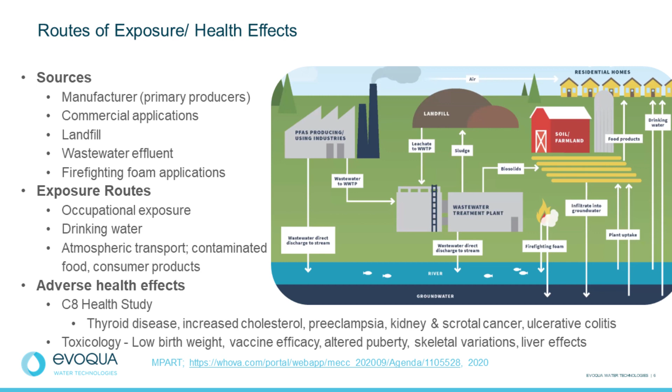In the end, results showed elevated levels of PFOA in the population, and we have since learned these levels in our blood can cause several medical conditions. According to the CDC, lab results have linked adverse health effects to growth, development, reproduction, and liver effects. So John will talk about water treatment solutions and present some case studies.

Hello, can people hear me? I'm sorry, I think there was an audio issue. Jeff, can you hear me? We can hear you, John. Sorry about that. I don't know what happened.

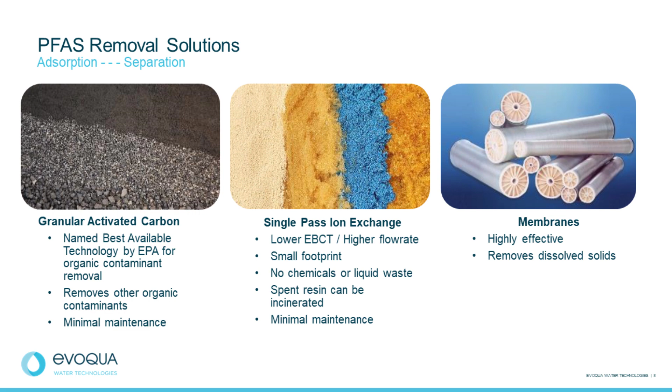Membranes, particularly RO and NF membranes, are very highly effective at separating PFAS from a water stream. They also remove other dissolved solids. However, you do end up with a smaller but more concentrated stream of contaminants at the end to deal with. There are a few applications that we know of where membranes have been chosen over either carbon or resin solely because of the number of contaminants in the water, not just PFAS but other things that have to be removed, kind of a veritable witch's brew of contaminants. So if you're not selectively removing, membranes are highly effective.

So why does granular activated carbon work? Granular activated carbon is a highly porous media. It has an extremely large surface area, so there's a lot of room for contaminant adsorption. That's AD, not to be confused with AB, absorption, very different processes. The structure of the carbon has a lot to do with it, which is why all carbons are not created equal. There are three main pore structures: the macropores, which are the largest pores, the mesopores, which are the medium pores, and the micropores, which are the smallest.

Adsorption actually takes place at the micropore. As a contaminant is adsorbed, it moves its way down that pore to get into the smallest area, the micropore. So the mesopores we call transport pores. We think of this as parking lots and highways: the mesopores are the highways and the micropores are the parking spots. If you've ever been to a sporting or concert event, if you have a lot of roads but small parking spots, you're going to end up sitting on the highway.

And if you have a lot of parking spots but no roads getting in, you're going to end up being stuck in traffic at the end of the game. So both of those things you have to balance so you don't get impaired diffusion into the pore.

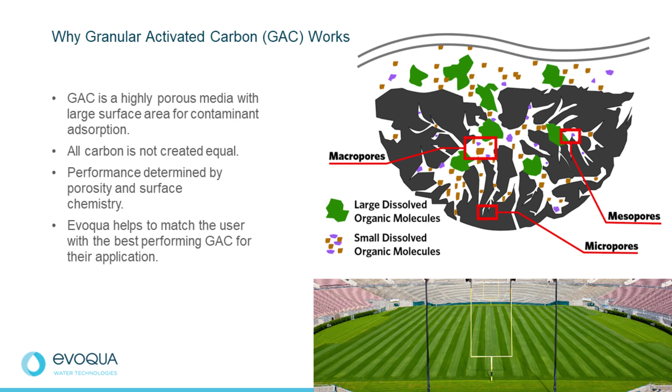So performance, how do you determine what carbon is best? Well, it all depends on what's coming in. We look at a combination of porosity and surface chemistry to determine which one's the best, and Evoqua does help do that to match the best performing carbon for the specific application.

So a little bit about ion exchange. So why and how does ion exchange resin work? Ion exchange is based on a very simple principle of exchanging a harmless ion for the contaminant. So in the picture there above with the green specks as the contaminants and the yellow circles as in this case chloride, where we're using an anion exchange resin for removal of PFAS.

So in this case, the contaminant exchanges a chloride and the contaminant stays on the resin, and the resin actually also has an adsorption feature to it. So it actually moves and migrates those contaminants down into the porosity of the structure. And then it exchanges basically the harmless chloride ion at the end. Because of this combination of exchange and adsorption, it basically uses a smaller footprint.

So if space is an issue, ion exchange resin may be a better option, all depending upon what's in your water and other competing contaminants and other things along those lines. Life cycle costs are a little bit easier to predict because of the effects of ion exchange resin, and the spent resin can currently be incinerated.

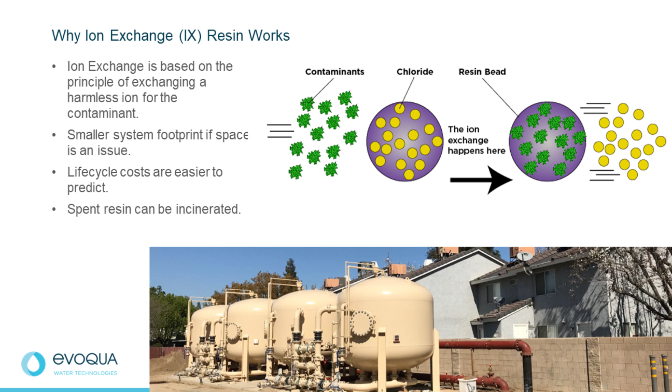So it can help you predict things like throughput, breakthrough curves, how long you're going to get, so throughput values, and performance. How are you going to get for removal? What components may break through first, et cetera. So between a combination of pilots or bench scale, usually depending upon the timing and everything else, one takes a lot longer.

Piloting is actually done on a slipstream of your feed water, and typically that can run for anywhere from months to a year. Whereas bench scale testing can be a simulation of a full scale system that can be done in a couple of weeks' time. Accelerated bench scale can simulate months of runtime actually within days.

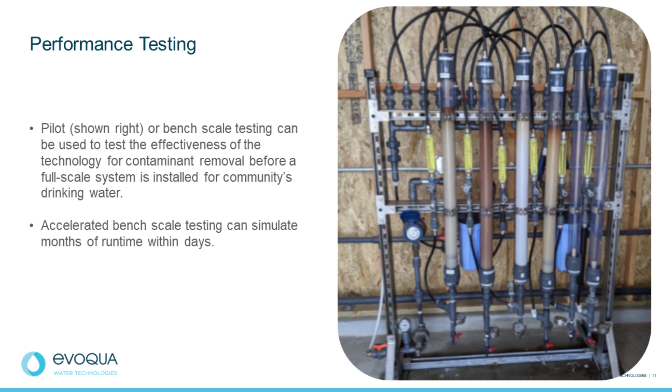One of the other things that's not on that, there's also the availability of mobile units. When operation can't be interrupted, or if there's an emergency situation, something rapid needs to happen. So Evoqua, and I know others, has emergency or rapid response equipment, trailers, vessels, other things, and we do it in more than drinking water applications. We can do it in construction site treatment or construction dewatering. We can do industrial process water treatment and industrial wastewater treatment.

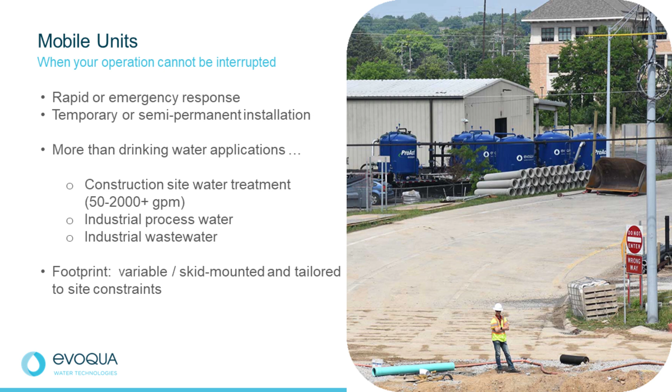So basically, the configuration can be determined by your flow rate and your contaminants, and we have variable skid-mounted and tailored equipment to fit your site constraints. And this is actually a picture of a site in Michigan for a construction dewatering project. So mobile units are an effective and temporary way to get people out of a jam or to keep processes running when an emergency or an event occurs.

So I'm going to talk a little bit now about some case studies. So we're going to talk about water treatment at a construction site and contaminant removal. This is a site up in Western Michigan that needed to be done in a quick timeline. It was installed about 6 months ago and is currently still active. They were doing some lakefront development, and there was a very high water table, and they found contaminants in the water, PFAS specifically, that needed to be treated for that dewatering to be discharged.

So the city set treatment goals to non-detect. So, 0 is an infinite number to get to. So non-detect means that it's down to the current detection limits, which is a very important thing. 0 really is a very finite number. It's an infinite treatment, but a very finite number.

For changing regulations and changing technologies, non-detect really is the way to go, just because it takes into account current standards. In this case, the treatment goal was met throughout the project and it's still operating, and it's been a good system for the end user, and it's been very easily maintained and serviced for the clients as well, for the construction company.

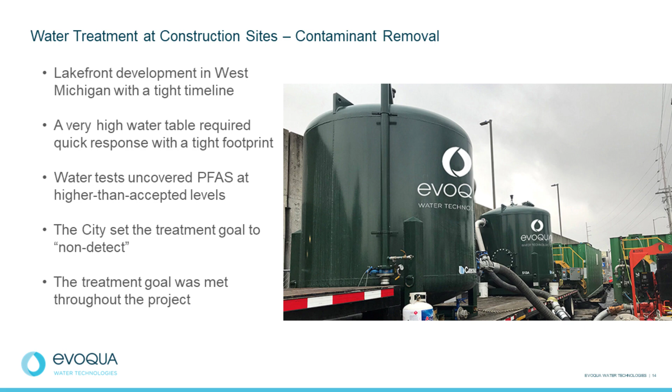We have another water treatment construction site. This one is in Muskegon. It was a temporary system, same type of thing, contaminant removal for a construction project. It was about a 6-week project where they were doing the same thing, construction dewatering. The water that they were having to discharge tested positive for PFAS, metals, and other organics.

So Evoqua was contacted, and we mobilized a system that tapped directly into the wellhead, and it removed PFAS, arsenic, mercury, and other contaminants that were in the water. So it was a very robust system. It cleaned the effluent discharge, which was put to a municipal sewer for further treatment.

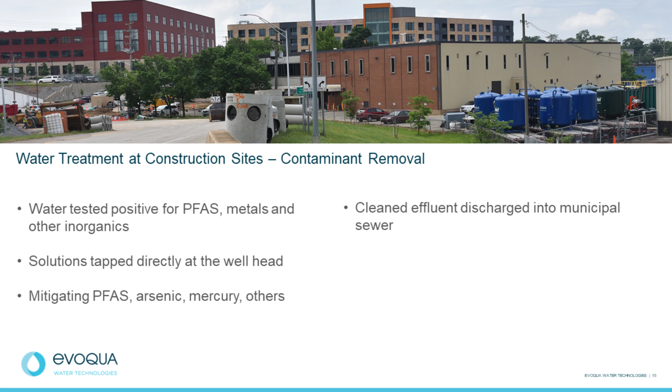So it's not just one, it was a combination of other things. You can see by the picture at the top, there's different color vessels. They all look about the same size, as you can tell, but they also have different medias in there for removal.

We currently have a temporary system operating in Colorado. It was installed to mitigate seasonal taste and odor issues, specifically MIB, or methylisoborneol, and geosmin. The municipality was planning on designing a new facility, but it wouldn't be available just because of the whole design and funding process and everything. But they needed a solution before the warmer weather season turned.

So we did some bench scale testing because they didn't have time to run a pilot. We did some rapid small scale column tests. That's the RSSCT. We did some RSSCT testing to validate the system using granular activated carbon. We put some systems in parallel and installed it. It has been running about 3 months, and they're still running it below detection levels for MIB and the geosmin.

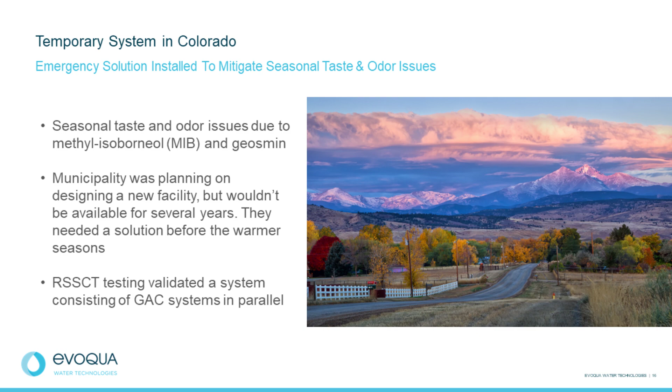The next case study is Kennebunk, Kennebunkport and Wells Water District in Kennebunk, Maine. This is a very proactive water system. They detected PFAS as part of the UCMR3 testing back in 2016. This was at one of their wells, one of the newly developed wells actually, and before they implemented a solution, they decided to shut the well down. They didn't want to run water through it, and they wanted to pilot several types of carbon to determine which performed best based on their local chemistry.

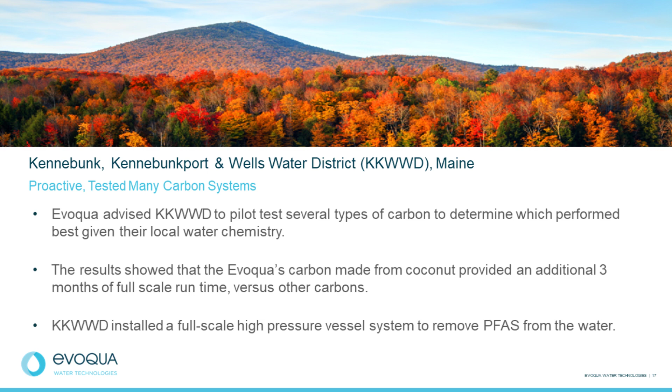And they are a very proactive water district in general, very hands-on, do a lot of things internally. After months of pilot testing, the results showed that a carbon made from our enhanced coconut product provided an additional 3 months of full-scale runtime versus other carbons. And I'll get to some more information on that on the next slides. But they installed a full-scale high-pressure system to remove PFAS from the water. It's still operating, and they've been very happy with it.

On the photo on the right now, if it's come up on your screens, is an actual photo of the pilot that was taken at the site. So you can see the influent, in this case for PFOA, was about 10. And we had a standard coconut, which is kind of the black line, the darkest line. Then we had our standard 12 by 40 coal, which is the green line.

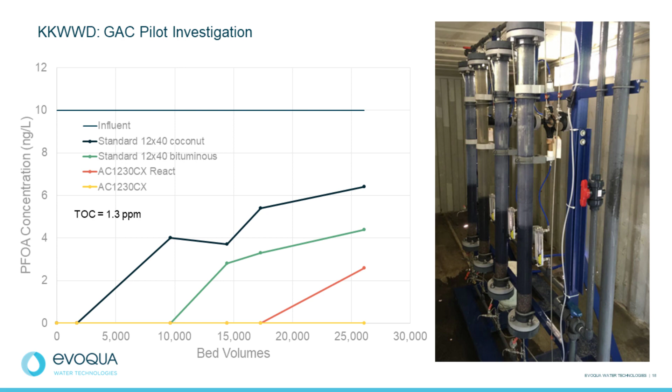Then we had our enhanced coconut product, which is our reactivated product, a potable react product. That's the red line. And then we had our virgin enhanced coconut 1230CX, which is the yellow line. And you can see by the bed volumes that the CX product outperformed all the other ones and gave an additional 3 months of runtime to the overall operation.

So after they installed the solution, they put a 12-foot diameter sand vessel up front to remove iron and manganese, injecting a little bit of chlorine. And then they had one lead lag GAC system, so 2 vessels in series. You can see that in the photo. They were both 12-foot diameter vessels. They put about 34,700 pounds of the CX media into each vessel with a 10-minute empty bed contact time on the design, but 8 minutes on the actual when they're running at peak to handle the summer seasonal flow.

It was originally an outdoor installation, as shown in this picture. They poured a pad and had it outside. But of course, being in Maine, the system had to be relocated indoors. They had put up a new building down the street and relocated the installation and the equipment over the winter when there was lower demand on the water. So in this case, and you can see the bottom right picture, we use Evoqua's SEPTA design, which allows for built-in flexibility.

You can see those cones sticking up through the bottom, or the hats, they look like top hats if you see them, that stick up through the bottom of the vessel. It's a slotted screen that has a tremendous amount of surface area. It allows for changing of those slots or those screens without having to enter the vessel.

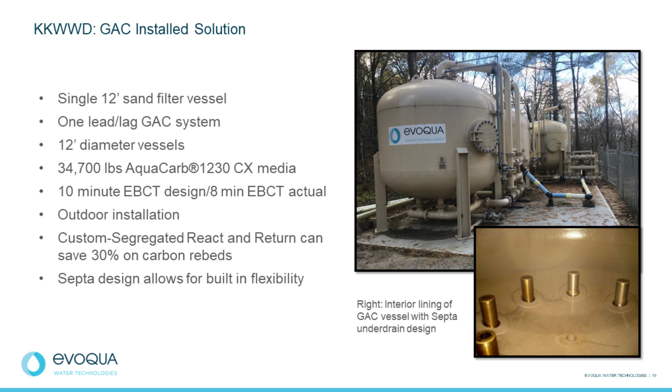The system went online in time for the tourists, and it was a minimal impact to ratepayers. The superintendent said the goal was to continually produce drinking water with non-detect levels, and basically the impact to the ratepayers was roughly 3 to 4 cents a day, and they won't really see a significant increase for several years.

And it kept them independent, which was what they really wanted to get out of this. And it was cheaper than buying water from an outside water utility or having to redevelop wells and do a whole bunch of other things. So it really met a bunch of their objectives by going with the granular activated carbon system in this case.

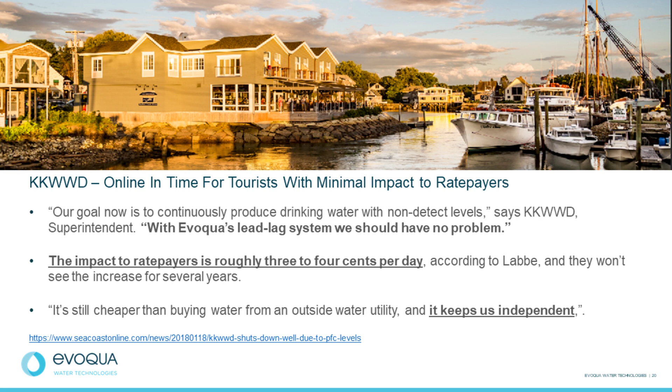Another case study here is in the southeast United States. It was a high TOC groundwater. This is another one where they went with a pilot system. You can see they started off with carbon, the dark media in the column. It's a drinking water application. The source of the contamination is unconfirmed, but they had influent concentrations of PFAS, PFOA, and PFOS above the EPA

LHA, Lifetime Health Advisory. The opportunity came in through an engineering firm that was working with the municipality on development and solution development, as well as trying to figure out how to put together a solution and do the hydro and geology part of it on how they were going to treat and determine the source.

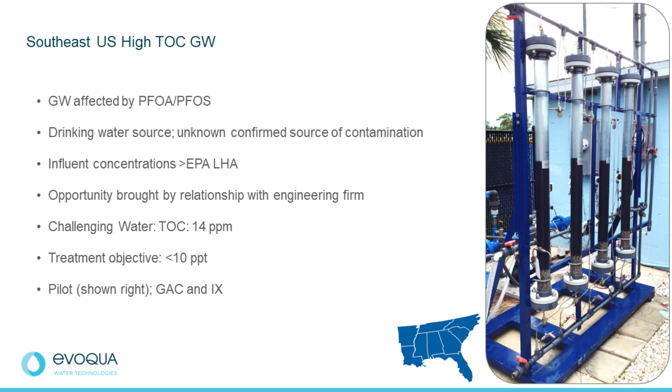It was a challenging water. It had a relatively high amount of TOC for a drinking water, which is not uncommon in Florida. It had about 14 ppm of TOC, and their objective was to get it down to less than 10 ppt for their PFAS compounds. We piloted both GAC and IX. The picture that you see here shows the GAC, but they did end up going with ion exchange resin.

So when we piloted the carbon, the high level of TOC caused fouling almost immediately. The pilot ran for several days before the pressure drop was so significant it wasn't worth continuing. So we switched out the carbon, put in ion exchange resin. Almost immediately within the first 24 hours, the resin turned black, but it still provided removal and continued to run without that pressure drop.

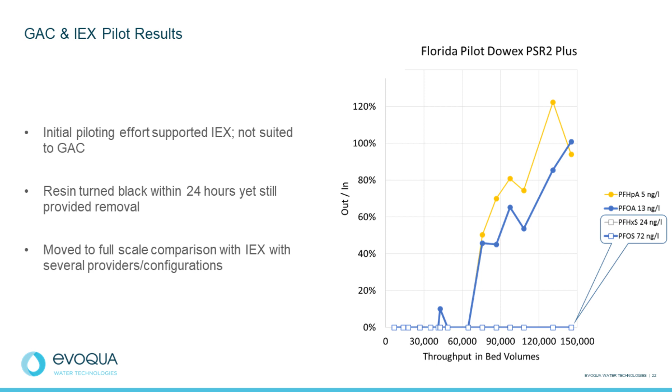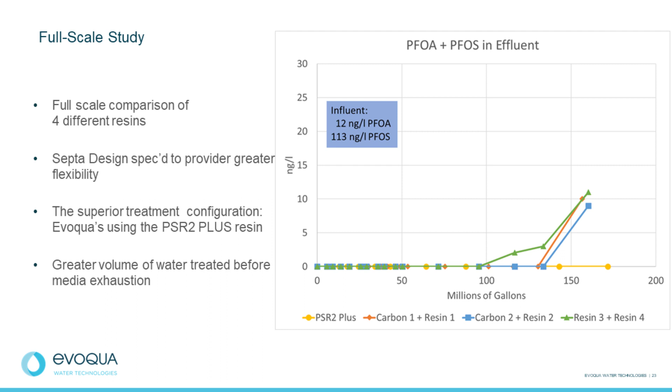They used resin and then put a carbon cap on top of it because they had some concerns with taste and odor and color in the water as well. So using that carbon cap to help provide them with a little bit of aesthetic quality as well as removal of PFAS. So you can see that combination treated a greater volume of water and helped extend the media before it exhausted.

So to wrap it up, our portfolio of comprehensive solutions. So we offer a portfolio really from start to finish. We can rapidly deploy mobile assets to your facility, offer treatability studies to help identify the best available technology today. I think John did a great job outlining that in some of the case studies, and also offer permanent on-site solutions. We employ a dynamic servicing network able to be on-site in most of the U.S. within 2 hours, and our reactivation services are there to help regenerate your media.

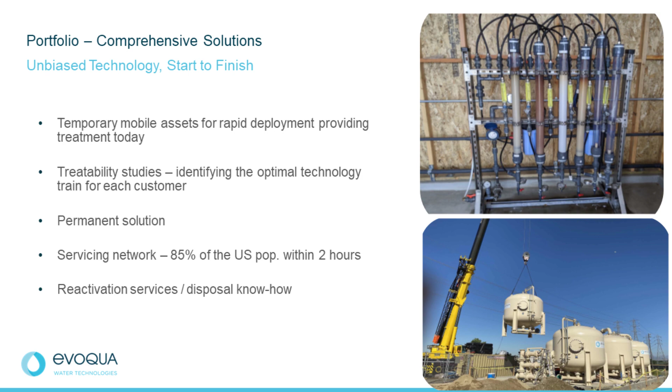And I'd say finally, our knowledge of disposal options, and this will kind of help you see the end of any waste that you have on site. So what could be the next steps? Where do we go? First, you want to assess risk on your site, determine the regulatory requirements, your surroundings, what's going on, maybe adjacent properties and things like that. Understand any public concerns, your brand recognition within your community.

And then I'd say obtain some background water quality and perform some PFAS analysis. Really try to understand what you have come into your system and what else might be out there. So you can do several different analytical test methods for those. And then determine if there are any remedial alternatives. And by that, I mean, understand the lifecycle costs of the system. Maybe there's some destruction technologies that are now available. And take a look at your disposal methods and what options are out there for you.

And then I would decide on what type of upfront site-specific testing methodologies you want to do. John explained pilot studies in detail, as well as the RSSCTs, and I think those are great options, at least to start your project.